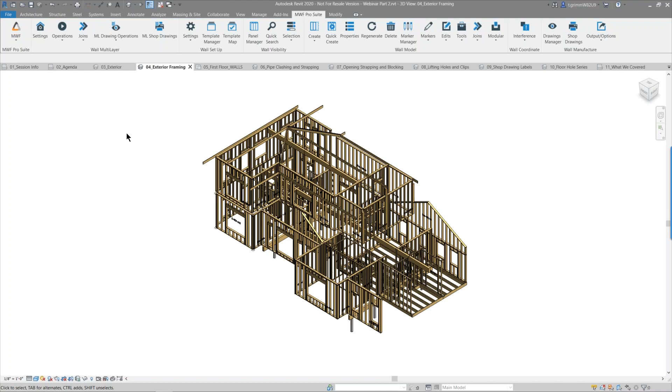Now let's get to the heart of the presentation. Today I'll be using a single unit residential model. It has been framed, and these are the areas of the model I'll be working in today.

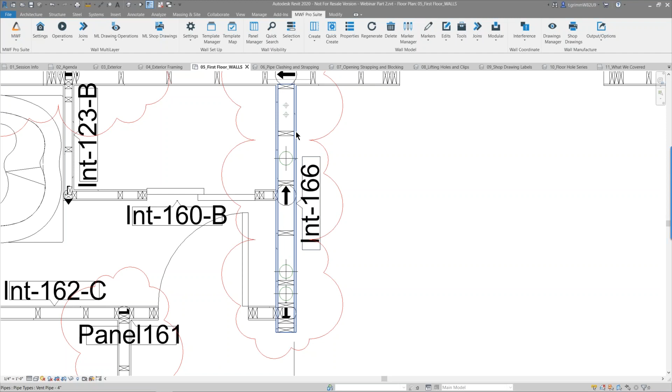First, I'm going to start with creating strapping for MEP clash holes in top and bottom tracks. So here I have a wall panel with several pipes, 3 that are large diameter and 2 that are small diameter. I'm going to go over to a 3D view that I have prepared for this purpose.

First I'll show how MWF has worked up to this point, and then I'll show the new feature. So if I hover over this bottom track, you'll see that there are no holes presently punched through for the MEP pipes. I'm going to select that member. It can be any member of the panel or the wall.

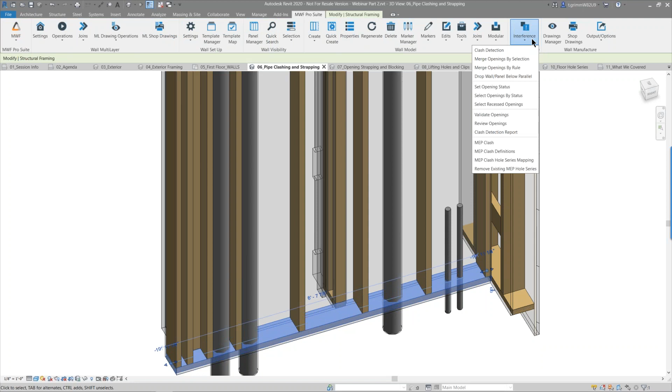I'm going to go to Interference, MEP Clash, and I have a clash operation prepared called Pipes. I'll click OK. MWF will report back that 8 holes were punched. And if I hover over that bottom track now, you can see those holes that were punched. They were punched in the top track as well for the 3 pipes that extend up through there.

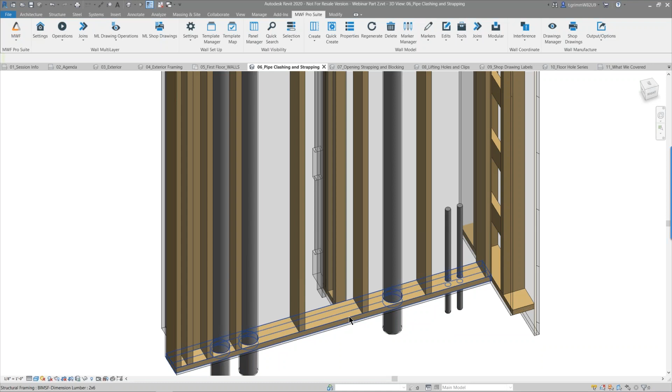Now, what's new is if I go to Interference, MEP Clash Hole Series Mapping, I'm going to uncheck all of these and just check on piping, because that's all I'm worried about presently. You can see I have my different diameter piping and different piping types over here, and I have them mapped to corresponding holes that are being punched in the framing.

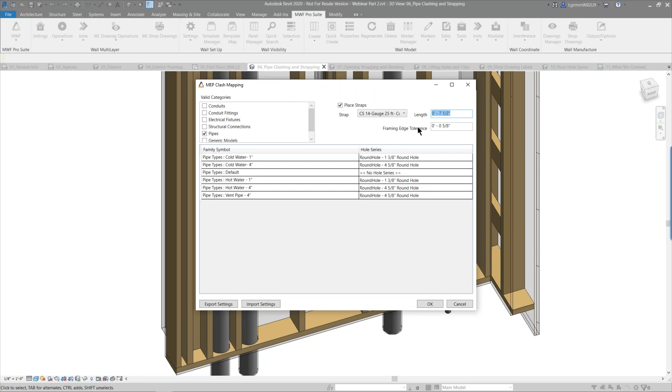What's new is up here in the upper right-hand corner, there's a Place Straps checkbox, which I'll check on. We have to select a straps family. I'm using one called CS 14 gauge. There's a length setting. Now this is the length from the center of pipe, so this is going to be 7.5 inches to either side.

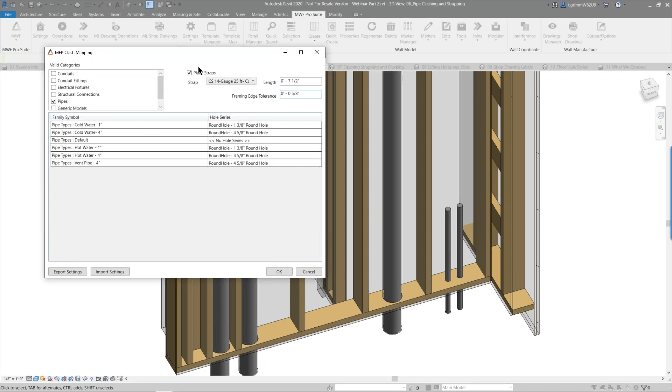There's also a tolerance setting, and any pipe that encroaches within this tolerance to the framing edge will receive a strap. Any pipes that don't encroach within that tolerance will not. So in my example, these 3 large diameter pipes are going to receive straps. The 2 smaller diameter pipes will not, but that is controlled by the tolerance setting. So again, Place Straps is enabled. I'll click OK.

First, I'm going to remove these existing holes, and then I'm going to run the clash again. It reports that 8 holes were punched, but additionally this time I also have straps.

Notice that I don't have them for the small diameter pipes, but I do have them for the large diameter. They're also on the top, and they're on this side of the framing and the opposite side as well. Notice over here to the left where I have 2 large diameter pipes that are close to each other, rather than getting 2 straps that overlap, there's a single strap here.

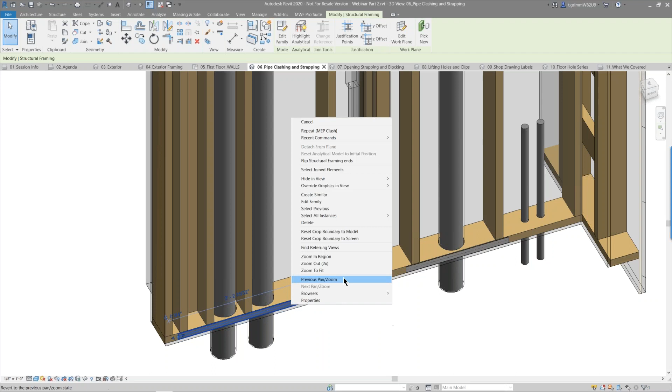Now, if I select this strap and right-click and choose Select All Instances Visible in View, Revit reports that there are 8 objects selected. So that's 2 on this side, 2 on the opposite side for the bottom track and 4 for the top track, for a total of 8.

Now what I'm going to show you is if I move this pipe far enough away, then I'll get an individual strap for this pipe. So I'm going to go back to my floor plan.

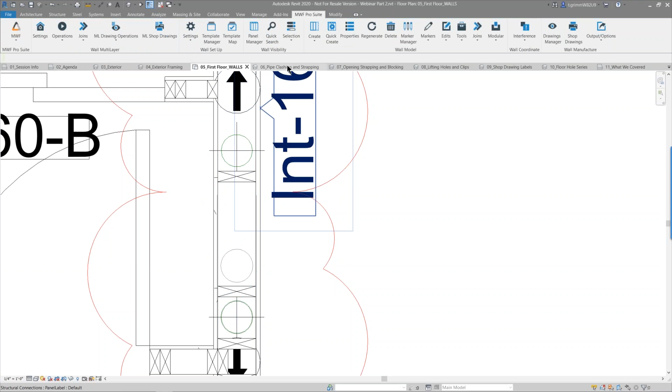Make sure I'm selecting the pipe. I'm going to move it from near this stud to near this stud. I'll go back to my 3D view. Again, first I'm going to remove the existing holes, and then I'll run the clash again. Now you can see that I have 2 straps where there was 1 previously.

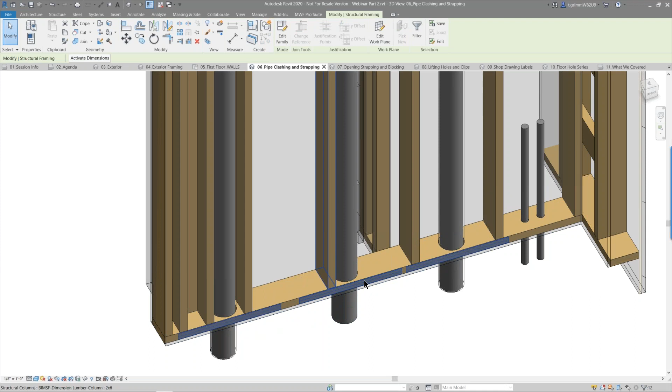I can also select one of these, right-click, select all instances visible in view, and now there are 12 rather than 8. So there's an additional one here, one on the other side, and then two more on the top. Okay, that is creating strapping for MEP clash holes in top and bottom tracks.

Next, we'll look at creating opening, strapping, and blocking. Here in my floor plan, I'm going to be working with this exterior wall. I do have a 3D view prepared for it.

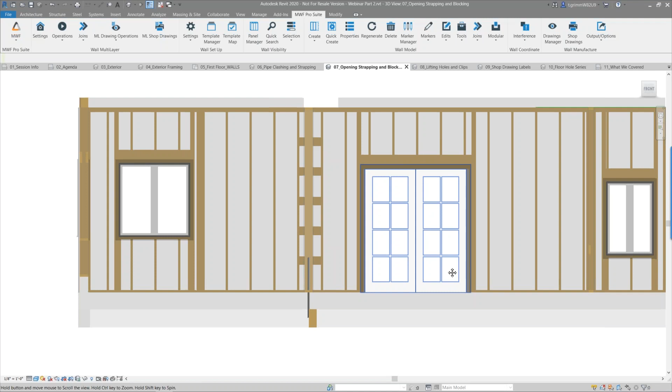Now, to frame this wall, I used a marker manager for the windows and doors, or a marker, I should say. And I'm going to go into Marker Manager, Opening, Single. And the marker type that I applied was the default wood-bearing beam top of window.

I'm going to modify a marker type so that it also includes strapping and blocking. We strongly encourage you not to modify delivered marker types. Instead, I'm going to copy this one.

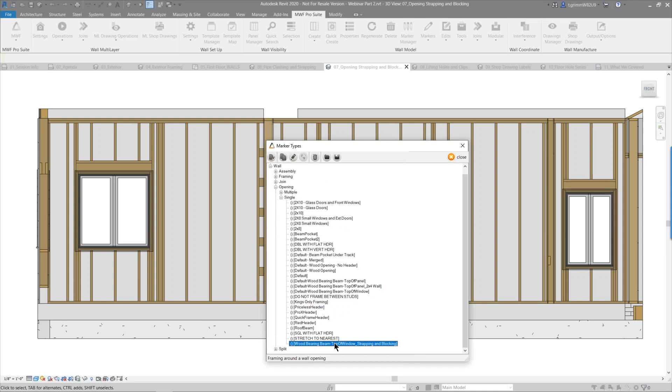I'll append strapping and blocking, and remove default. So that new marker type is created. I'll double click on that. And you can see that this is a copy of the marker type that I used to frame my openings.

What's new is in the lower right-hand corner, there's a checkbox for place opening straps. I'll check that on. For the strap, again, I need to choose the family. I'm going to select the CS14 gauge. The blocking, this is a 2x6 wall, so I'm going to choose a 2x6 member.

For the strap, we have the start and the end. And this 1 foot is going to extend 1 foot past the opening. Now, what I'm going to do for the start, rather than using a length, I'm going to specify panel end. So it's going to extend the strapping to the end of the panel, regardless of how far the opening is away from the end of the panel.

The placement, we can place straps and blocking on both sides, on the exterior of the wall only, or the interior only. I'm going to leave it set to default. You can specify a vertical offset from both the header and the sill. In the lower right-hand corner, we have an area for connectors.

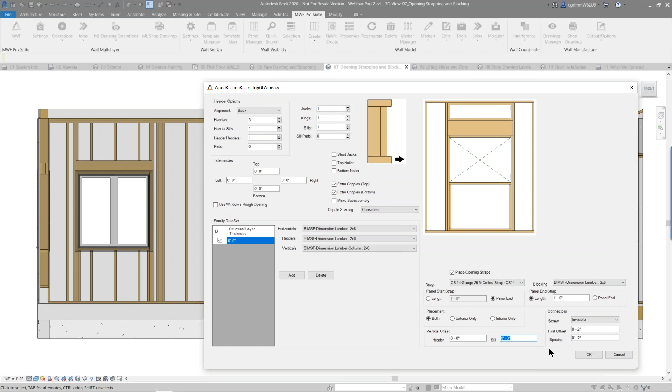Screws I currently have set to be invisible. We can specify an offset and a spacing, and I'll leave those as default, but we can count those screws later on if we want to. I'll click OK. Close this dialog box.

Now I'll simply select this opening. Go to Markers, Apply Opening Type. And I'm going to select the one that I just created. Now I'll select a panel member and regenerate this wall.

And because I applied the new marker type to that window, we should see strapping and blocking around it. Okay, you can see the 2x6 blocking. Here's the strap. Now this is the beginning of my panels over here, so this is the side that's being extended. This is being set to 1 foot on this side for the strapping.

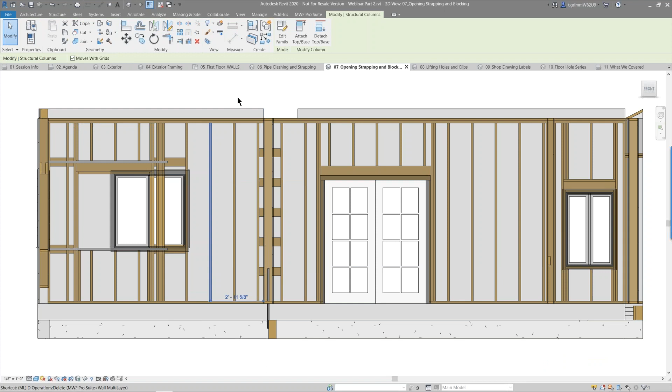If I select this window and move it 2 feet, and again regenerate the wall, you'll see that the strap to the right of the window stays 1 foot because I've specified that length. On the left, the strap is going to get longer because it's still extending over to the end of the panel. And there's corresponding blocking with that.

Okay, that is creating opening, strapping, and blocking. Next, I'll cover creating lifting holes with clips.

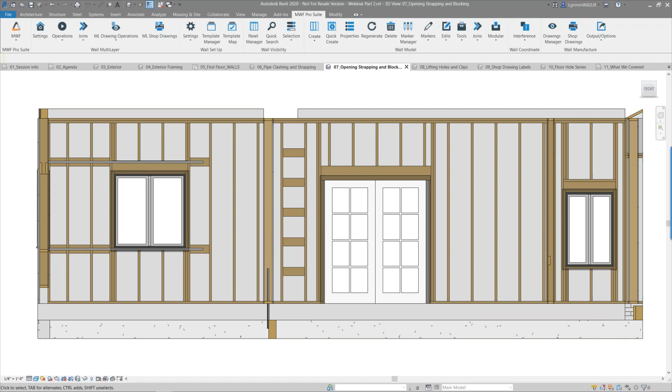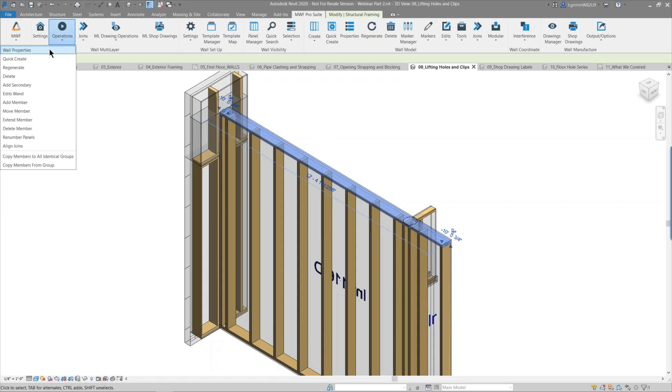And I'm going to be using this wall right here, and I do have a view set up for this. You can see at the top of the panel, there are no lifting holes or clips presently. I'm going to select one of these members, and I'm going to go into the properties. I'll expand this dialog box.

Under the miscellaneous tab, we now have an item for lifting holes. I'm going to be using a style called Style A. I'll click Edit. And here's where we can specify our lifting holes. I'm going to select Same at both ends, or I could toggle that off.

If I toggle it off, I can do something like a user selected bay. Maybe I want to start with bay 2, and then maybe I want to end at bay 9. Instead, I'm going to use both the same at both ends. I'm going to go with the start bay, and on the end tab, it will default to the end bay. So that's correct, that's what I want.

For the clip placement, we can place them on both sides, or the interior only, or the exterior only. I'm going to leave both selected. I'll click Close.

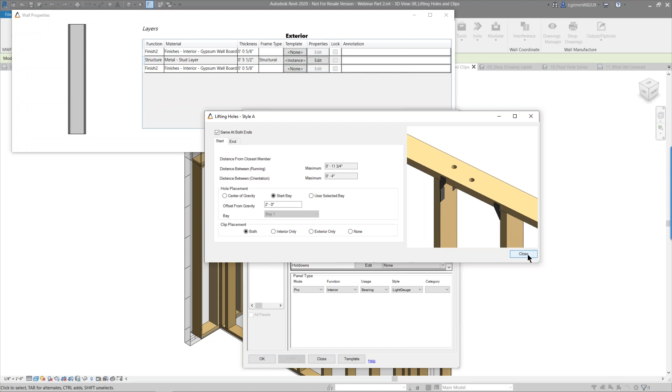Click OK. Now the panel is being regenerated. When it comes back in, you'll see that here are the lifting holes on both ends. And if I scroll in and pan around a little bit, you'll see that the clips are also there.

Next, we have generating shop drawing labels.

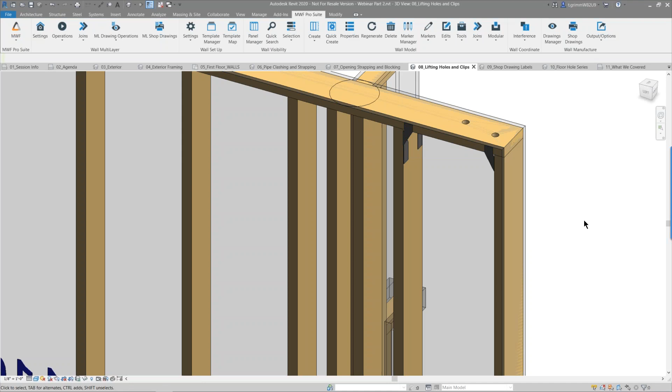For this portion, I'm going to work with this panel right here, and I do have a view set up for this already. So here's my panel. Again, first I'm going to show how MWF has worked to this point, and then I'll show you the new feature. So I'm going to open the project browser, and I just want to show you that under Sheets, there's only a single sheet, which is the cover sheet.

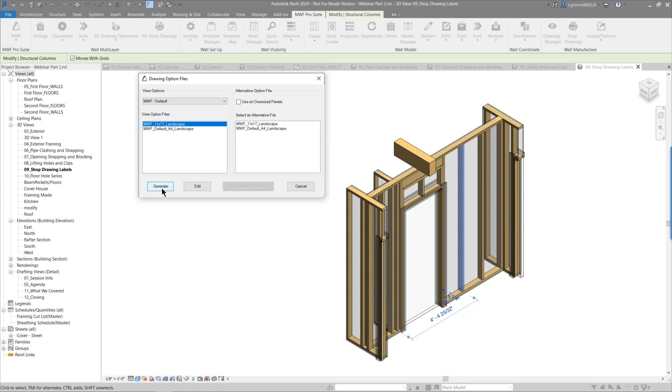I'll select a panel member, and I'll go to Shop Drawings. Here I have an 11 by 17 landscape set up. I'll click Generate. I now have a new sheet, and it's a framing shop drawing.

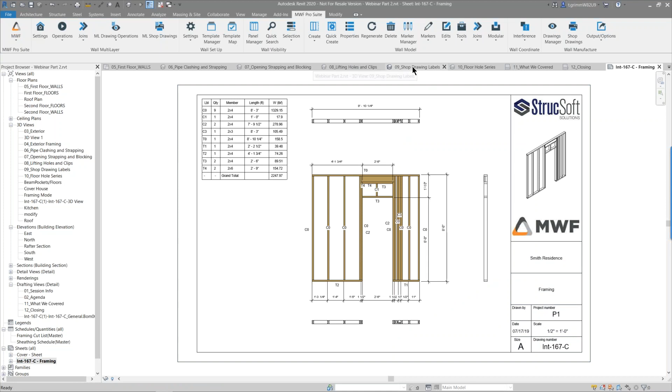Now I'll go to Drawings Manager. I'm going to select that 11 by 17 landscape. I'll click Edit. And the setting that we're interested in is Generate Panel Labels.

I'm going to check that on, and then I'll click the setting one for the shipping dates. I have both of those set to a 1/4 inch Arial. I'm not using an elevation view template. The elevation view orientation, I'm going to be looking at the interior of the panel. Detail level I've set to fine. I've set the scale to 3/16 of an inch equals 1 foot. Visual style I've set to hidden line.

I've specified a shipping date. That can be whatever you want it to be. And then there's a company logo option. If I click Browse, you can choose your company logo. I'm going to use the StrucSoft one, and I'm going to rotate it 90 degrees. Your mileage may vary on that - you may need to rotate it or perhaps not. It all depends on your logo. I'll click OK.

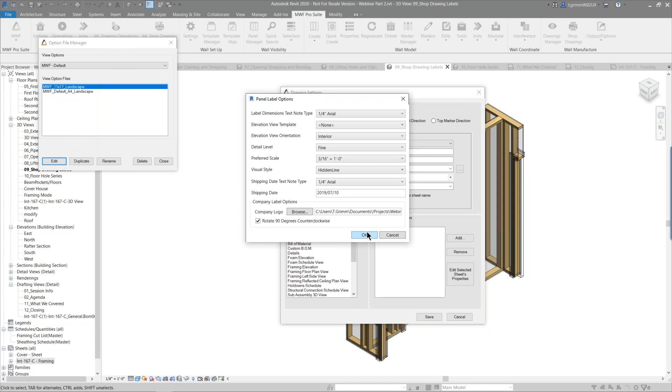Save this. And then I'll regenerate the shop drawing. Again, I have my framing shop drawing.

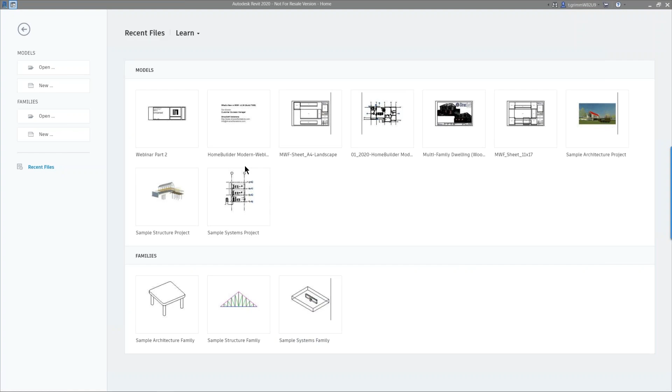Okay, now here I have a little problem. This was because I miskeyed something in earlier. So let me close this file quickly, then reopen it, and hopefully that will solve the issue.

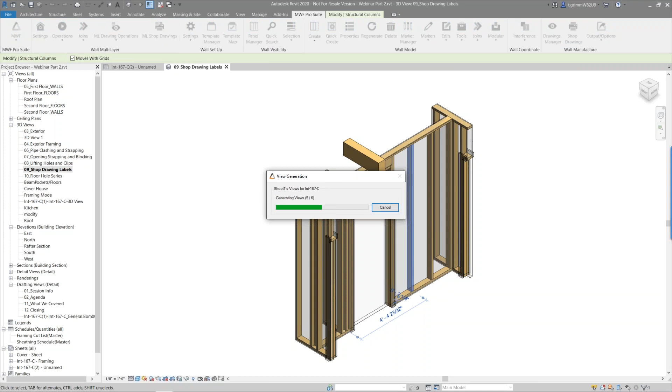I apologize, I'm going to have to close Revit quickly and reopen the file. This was actually my fault. If you heard a sort of a chime earlier, I miskeyed in a command, and that's affecting this process for some reason. I apologize.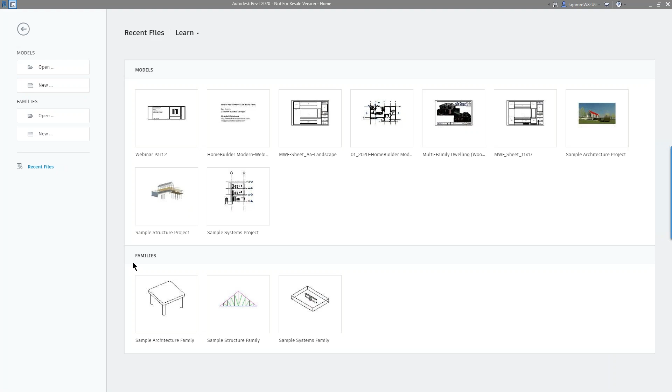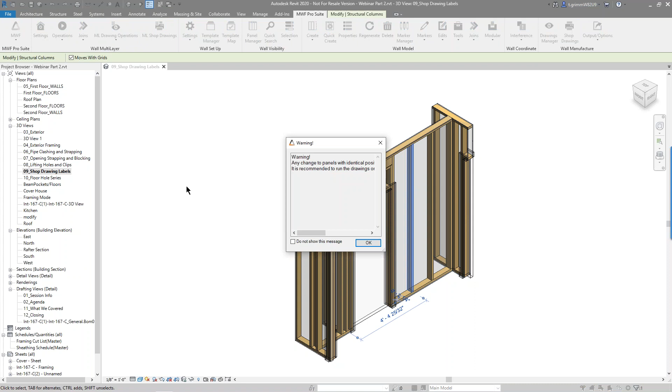We'll go to MWF and switch to our wall module, and I'll generate the shop drawings again. Hopefully this will work. If it doesn't, I can restore a previous version of the file and go from there, but hopefully this will work.

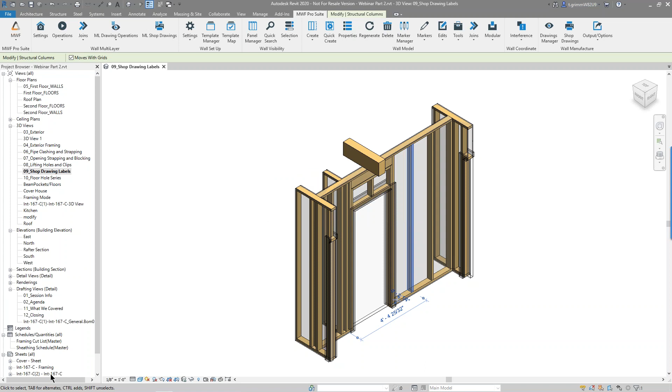And yes, you can see it did. So here for our label, you can see that I have the logo that I specified. It's pulling some information from the project information, the name of the project and the address. Here's the panel name. Here's the shipping date that I specified. There's a date timestamp here at the bottom. There are also the overall dimensions.

These are the two text note types that I specified. Of course, my elevation view. And then over to the right, we have a barcode. Now, if you scan this barcode, it will read the panel name. Okay, that is generating shop drawing labels. And again, I apologize for the problem there.

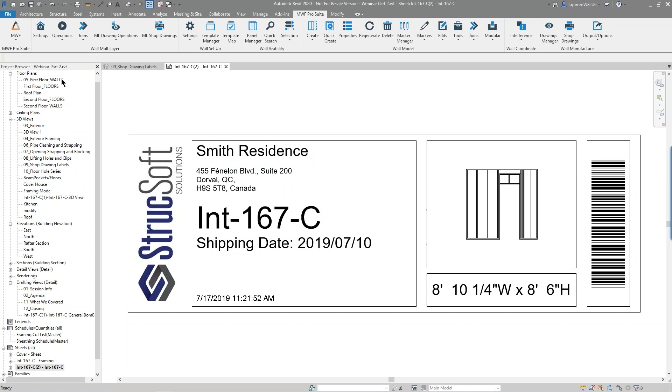Next, we'll take a look at regenerating floor hole series without regenerating panels. Let me open up my floor plan again. And for this, I'm going to be working over in this area of the model. You can see that I have a couple of marker lines, and I have some holes being punched through the floor joists. I actually have two floors here.

If I select one of the floors, you can see where the joint is. Same thing over here. Now, let's say I come in after the fact, and what I want to do is a couple of things. I want to move the marker lines, and I want to change the diameter of the holes.

So I'm simply going to grab these marker lines, and I'm going to move them 3 inches. I'll grab just one of the marker lines, and I'll move it 1 inch so they're closer together.

Now I'll switch to the floor module of MWF. I'll select the marker lines, and I'm going to go to Properties. Here's where I'll be able to change the diameter of those holes. Presently, they're 2 3/4. I'm going to change them to 4 5/8. I'll click OK.

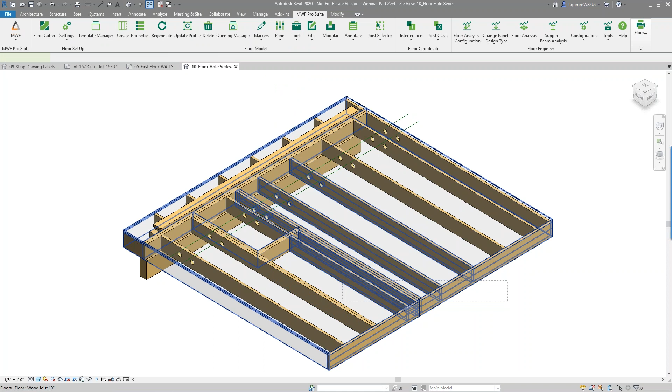Some of the members were extended and some were copied. So the new feature we've added is if I select the marker lines, I can go to Tools, Regenerate Hole Series. Oh sorry, I have to select the members. Apologies for that. Tools, Regenerate Hole Series.

Now I have the holes that I wanted. They've been moved, they're a little closer together, they're larger, but none of my panel members have been otherwise modified. So that is regenerating floor hole series without regenerating panels.

Lastly, I'm going to introduce our new online help center. For this, I'll go to my internet browser. And this is our new online help center. I'll highlight several of the features here. Scroll down a little bit.

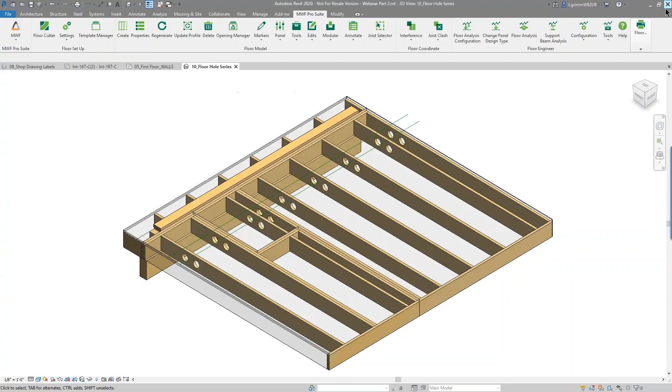The first one I'm going to touch on is online documentation. Previously, you would go under MWF to access our documentation. For instance, MWF wall manual is here, MWF floor manual is here. If I select that, a PDF opens that you can browse or search. That is our old documentation.

Now what we have here online as part of our online help center is our online documentation right here. So if I go to, for instance, MWF floor features, and maybe I'm interested in merging panels, then I can read about that online right here.

We can also search. So if I search for hole series, and I choose hole series and floor panels, then I can read about some of the things I did with the floor panel in the previous demonstration.

We also have FAQs. I can access it here, or I can scroll down and click on it here. These are some FAQs that we prepared so far. An interesting one I spotted is, how do I customize my help center? If I click on that, you can read about how to do that right here, and there's actually a link that explains that.

We also have best practices. This is going to be under general. These are best practices in Revit for a more efficient MWF project, things you should do in Revit that will help you out with MWF. Things like not purging your Revit model, because a lot of the settings loaded through the Load Data command in MWF will be lost. There are examples of that sort of thing in here. If I click on general, you'll probably be able to see, it's not there, but it is in here. I saw it earlier, okay.

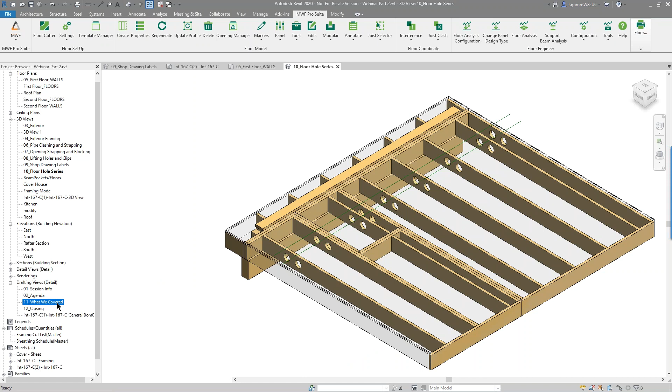That's all the technical material for today. Again, we covered creating strapping for MEP clash holes in top and bottom tracks, creating opening strapping and blocking, creating lifting holes with clips, generating shop drawing labels, regenerating floor hole series without regenerating panels, and lastly I introduced our new online help center. As I mentioned previously, more webinars will be scheduled at later dates to cover additional features in our latest release.